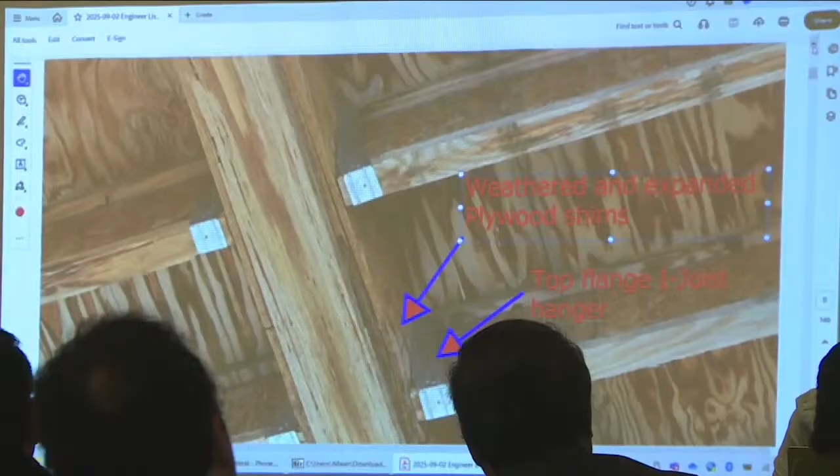And the next picture will show that condition. But before you go there, you see the 2 pieces of plywood? Can we zoom in on that picture a little bit? Up a little bit, please. See the weather-exposed plywood shims? It's being pulled outward because of water expansion.

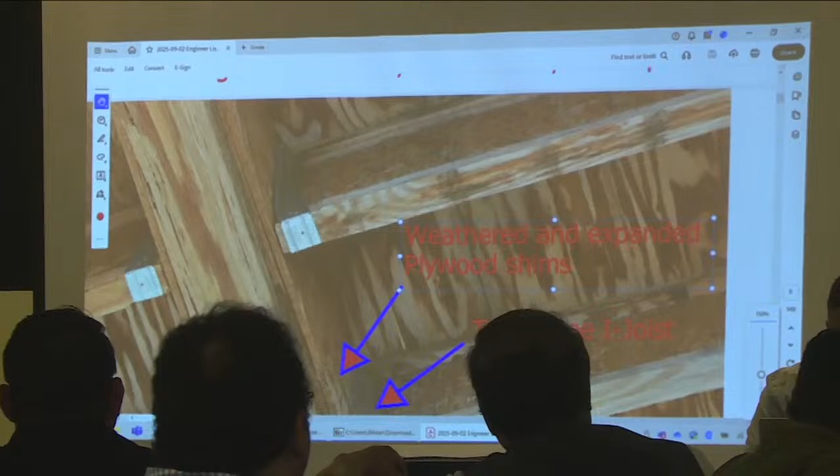With wood soaked in water, it tends to expand, and when it dries it does go back to where it is, but it just causes damage to the wood. And the I-joist, the top flange I-joist hanger there, is hanging off that double layer of 2x plywood.

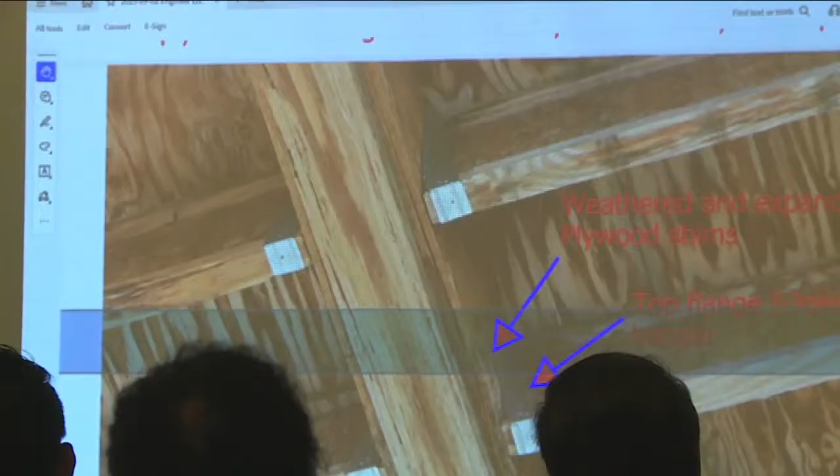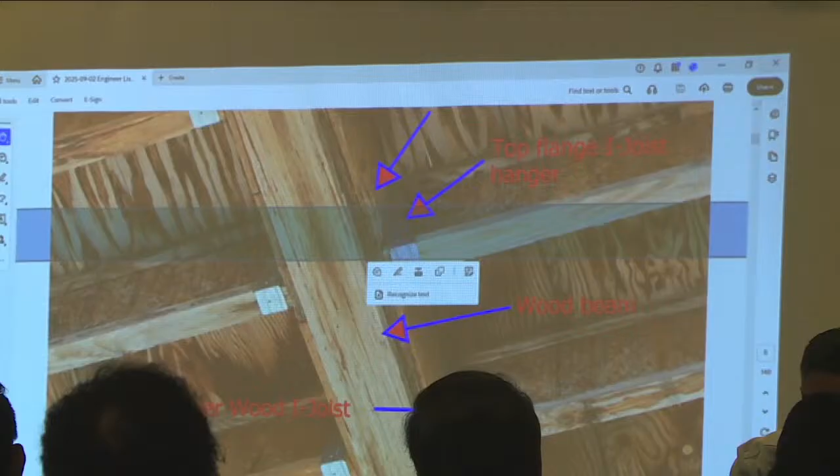And that's a no-no because the top flange is nailed on top of beams. Plywood has joints in between. When you put 2 pieces of plywood next to another beam, you have 2 joints in there. Next picture, I'll show you the reason why.

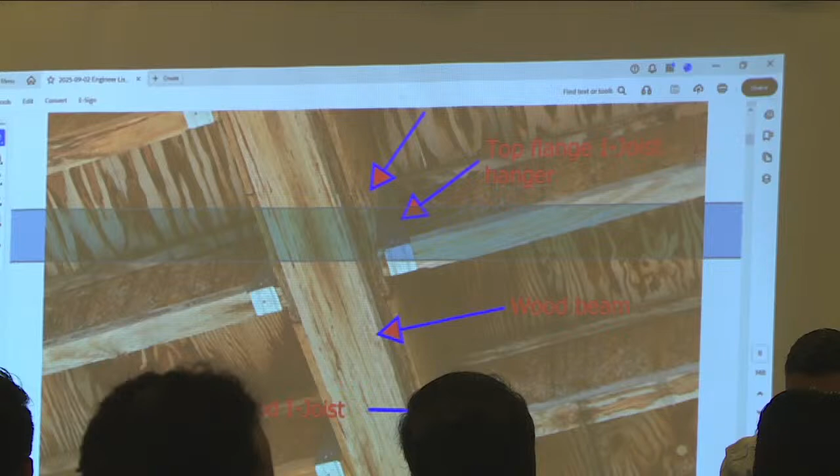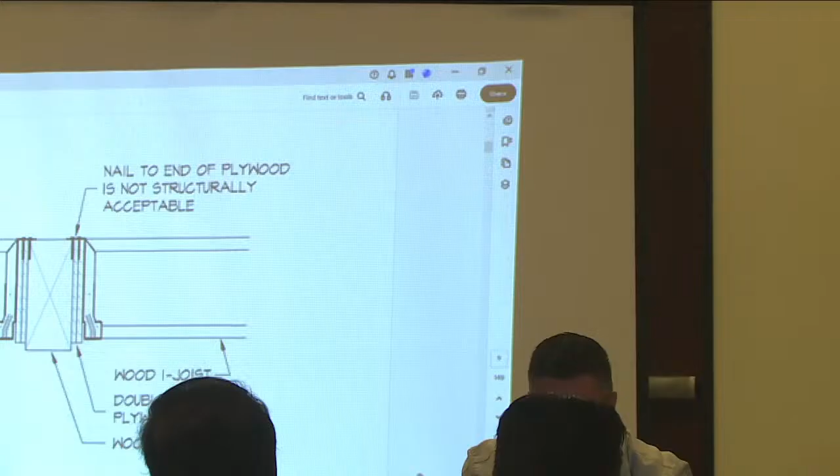Picture next. There's a beam, zoom in on that top portion. Okay, you see there's a double layer plywood, about half inch thick from my vision from the ground up.

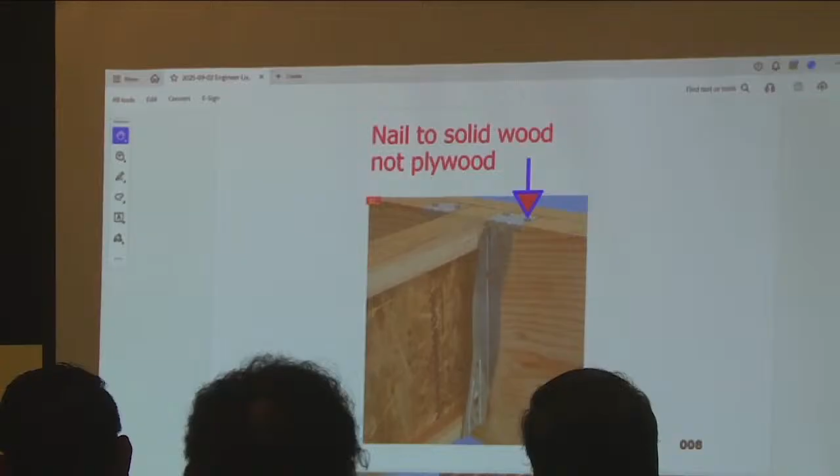Top portion, please, top one please. The top flange hanger, the I-joist, with nails going to the edge of the plywood, is not structurally acceptable. As the nails try to penetrate that plywood, it hits between the plywood or on the plywood or next to the beam. That is no good, you don't have the structural value there.

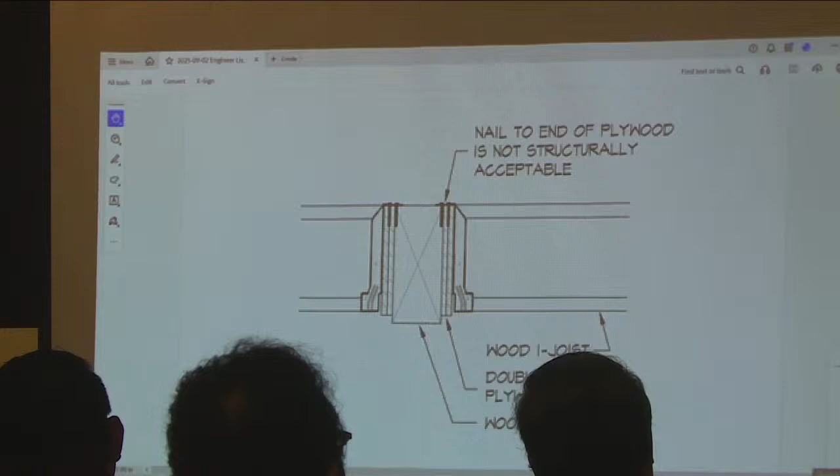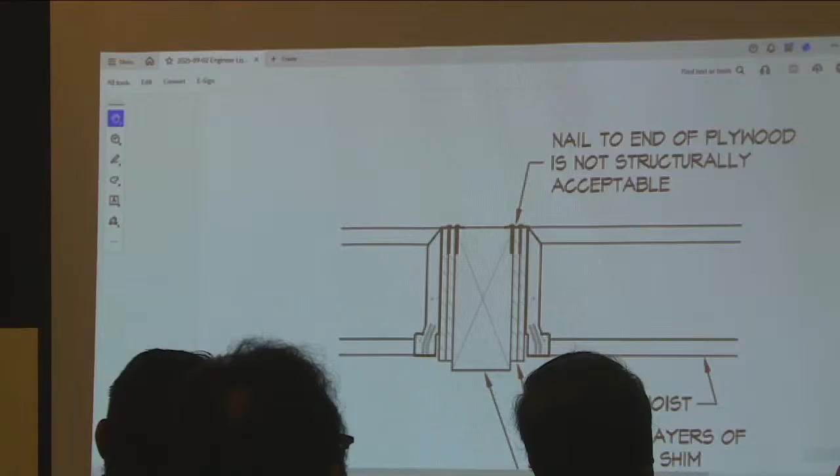Now, was that the only example you saw? Specifically, were there other I-joists nailed in similar fashion in this patio? I do, it does have that. And do you have a rough idea how many? Quite a bit, the majority of the portions on the north section of the roof have that. So many portions of the roof are being held up with joists that are nailed into plywood.

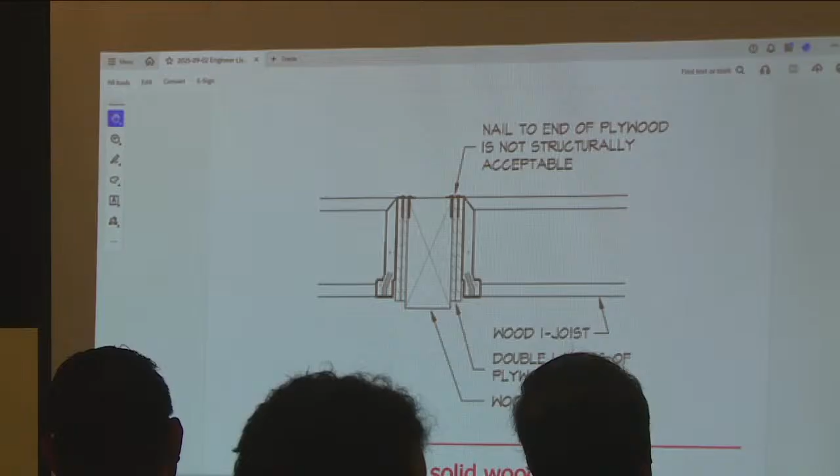If you go to the photo, the picture, page 3 of the PDF drawings, back. Okay, that forward.

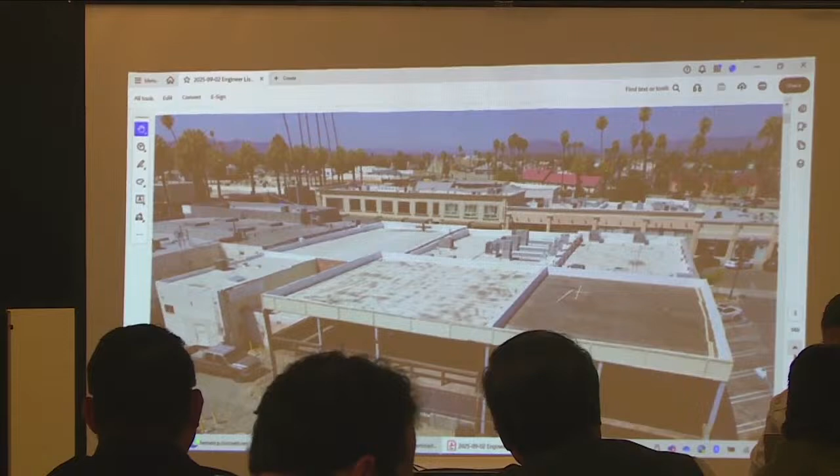That one there. Okay, could you zoom out?

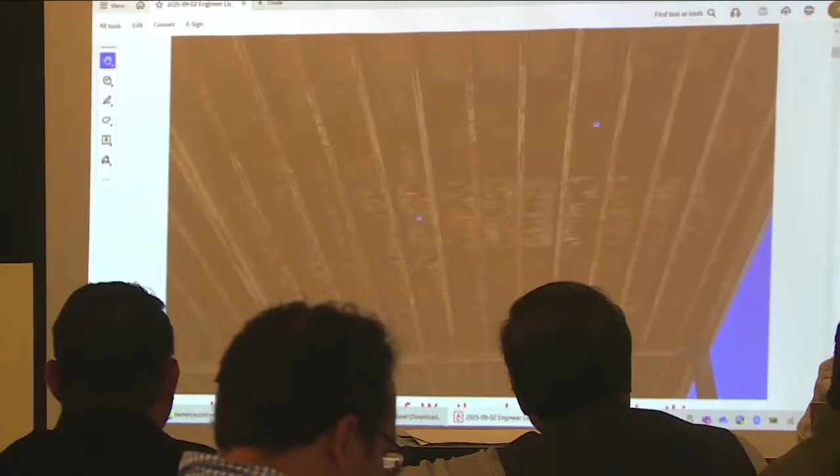There's that beam you're looking at right across there, the bottom portion. Bottom left, put it back up. The beam at the bottom of the screen goes left to right. That's the beam that has that shim plate. And the beam on the top portion, not visible in this picture, also has that. So there are several areas where you have this issue.

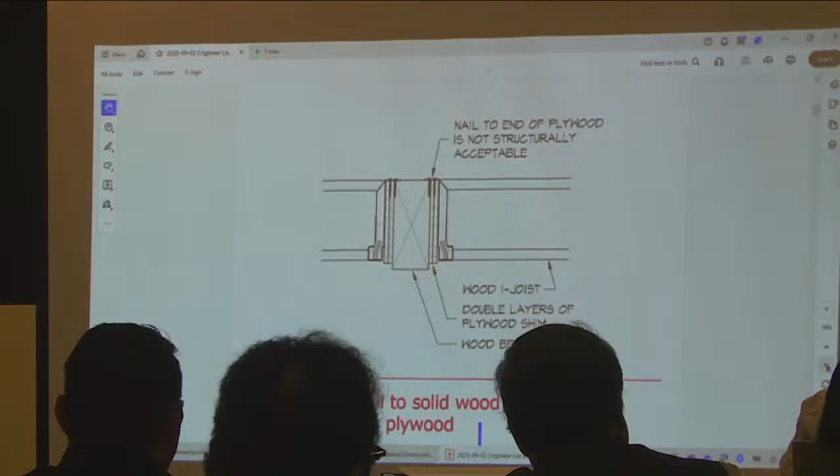And what is your conclusion as to the wood and joists of this patio structure? The roof sheathing is already weather exposed, has so much deterioration already and delamination on that. And the I-joist is constructed of the same type of material, laminated wood member, glued together to form the top and bottom chord. And the hanger on top flange are not structurally sound with its nails. The installation is considered improper by today's standard and manufacturer's requirements. So, in other words, the wood element of this structure is not sound.

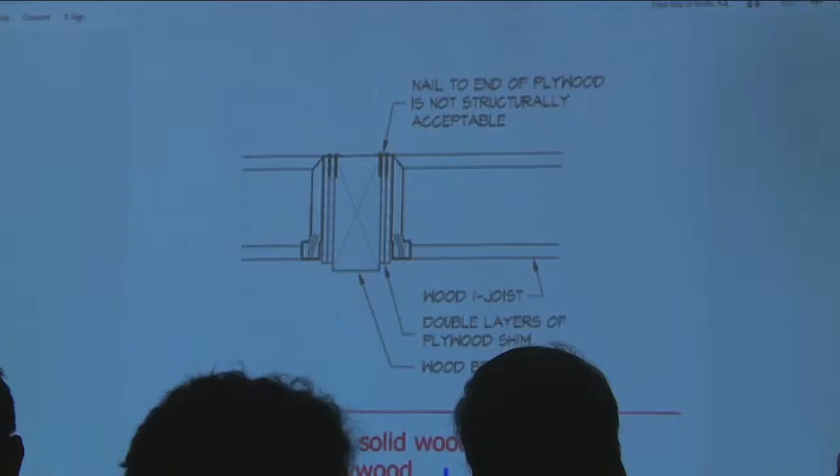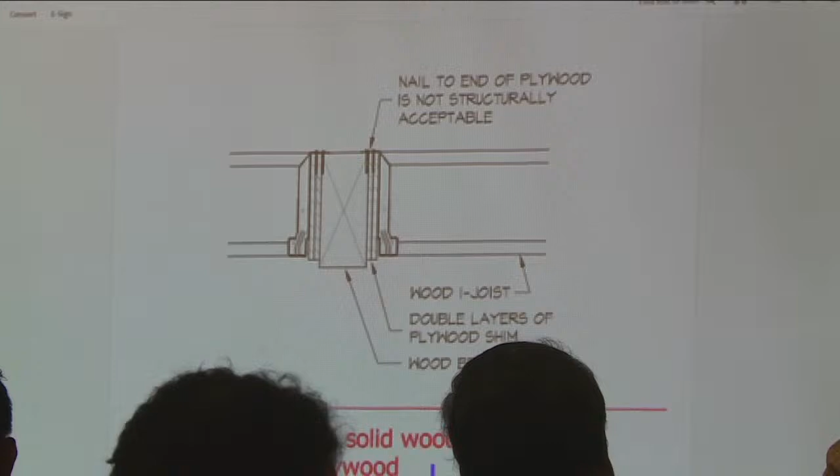No, it's not. And could that result in a collapse of the structure? Whereas the way it stands right now, nobody's touching it in there, it will stay in there for a little bit longer. But it is continually being weathered and weakening, is that correct? Correct.

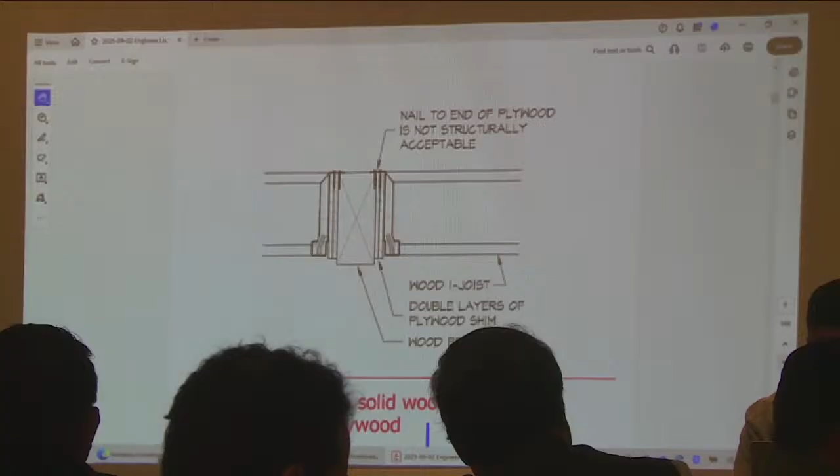All right, let's go to, did you also see any issues with the masonry wall? Yes. Can you discuss that a little bit more? Could I back up, answer another question on the previous picture a second?

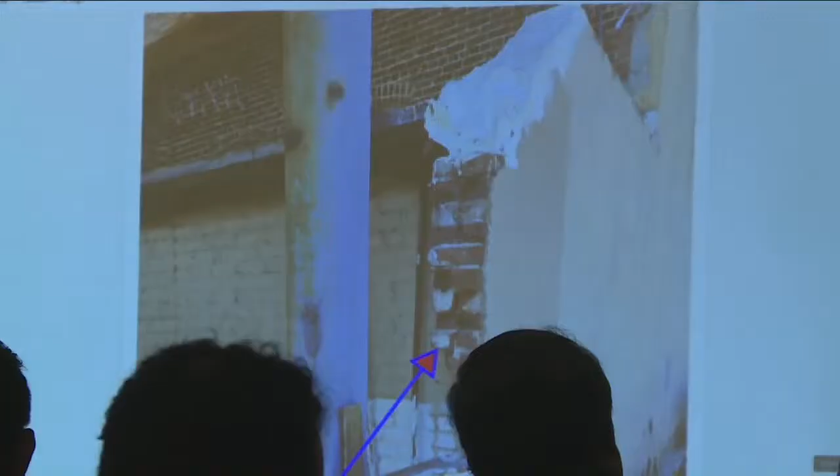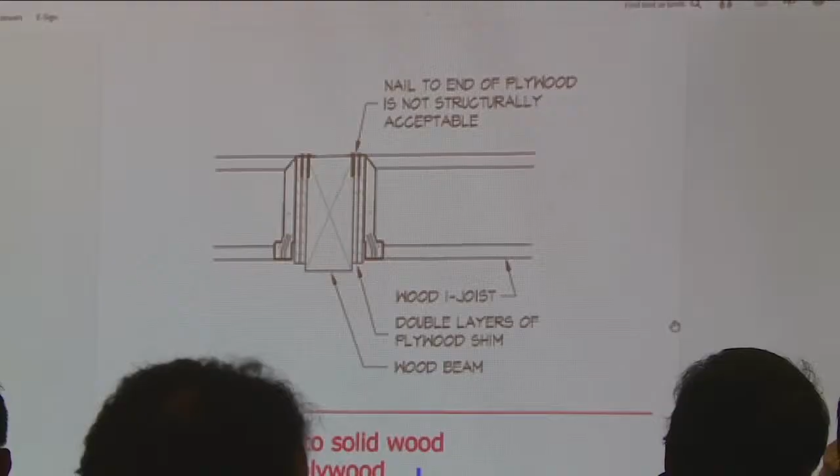If the beam is in question, the I-joist is a much smaller material built of the same type of laminations, glue. Plywood is also veneer sheet that is using glue, exposed a long period of time and weather, is highly questioned and safety is a concern.

And the owner's engineer has raised similar concerns. Yes, the original engineer's statement, dated May 17, 2024, item number 2.

This one here, you talk about this particular picture. Not that particular picture, but in general, why is the wall relevant to the patio? The wall right now we're using to bear the floor load and the roof load. The way it is right now, you zoom in, you see a lot of hollow space in between the brick wall.

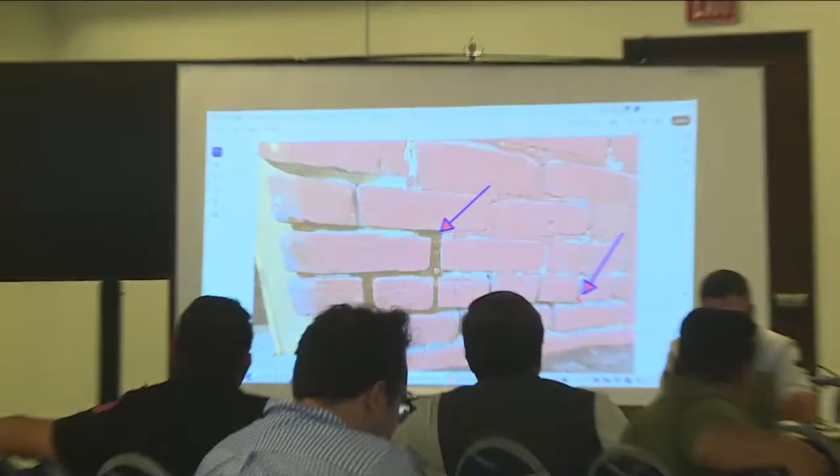That's insulation, it's still in the void space. So that's foam being used to fill in the void. Correct. And is that allowed for? It's not structurally sound, no.

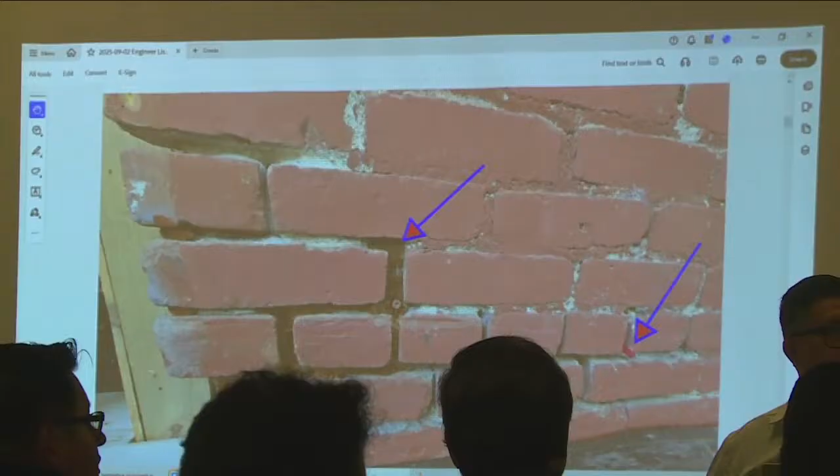Despite the building's age, you think that the building is going to fall down based upon the condition of the building? The building right now has a certain portion of void space inside.

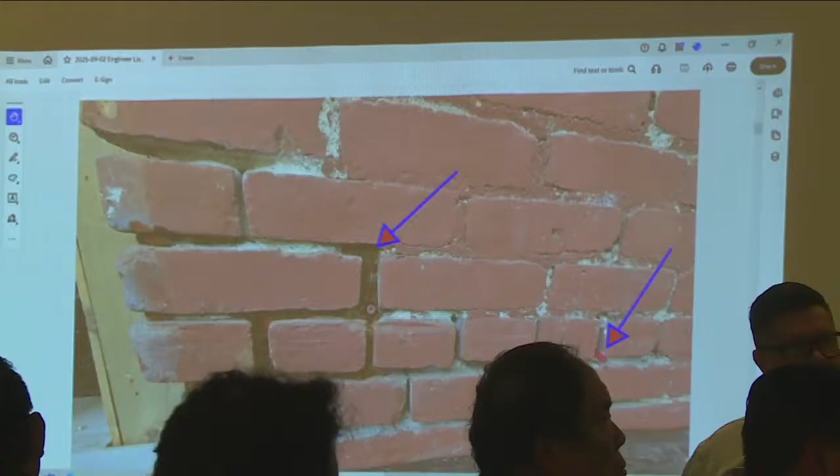This is a double layer brick wall. We are not stressing the main portion of the wall. Think of this wall as having two layers. One layer you look at right here, another layer is at the back side of the building.

Okay, next photo. What are we looking at here? This is my pen, I'm showing how far I'm poking in. I hit nothing.

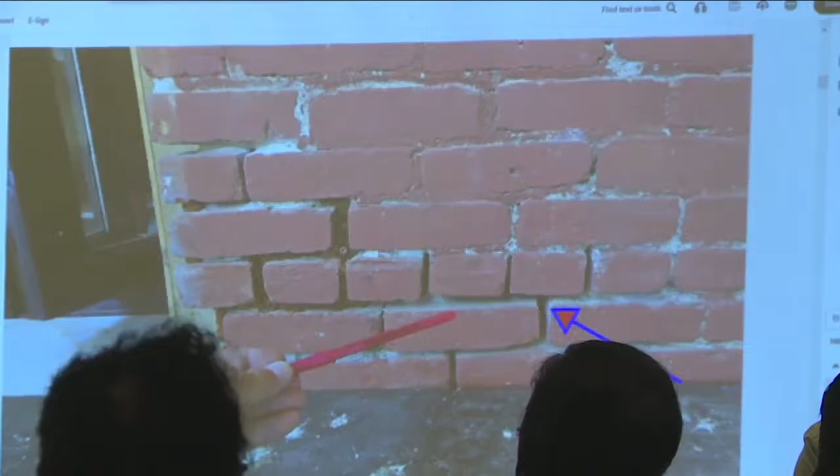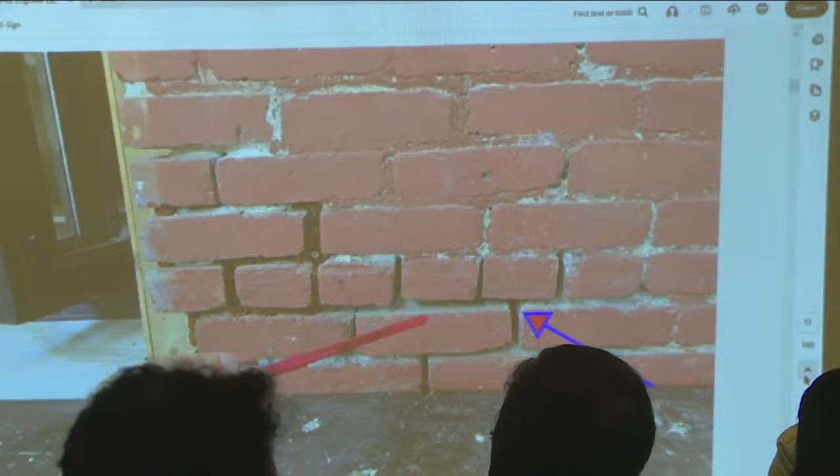Now, normally, could anybody stick anything between bricks that far? You can't do that, I really don't. And what does that amount of space indicate? That amount of space is telling that there's a structural issue. This wall will get addressed before something happens.

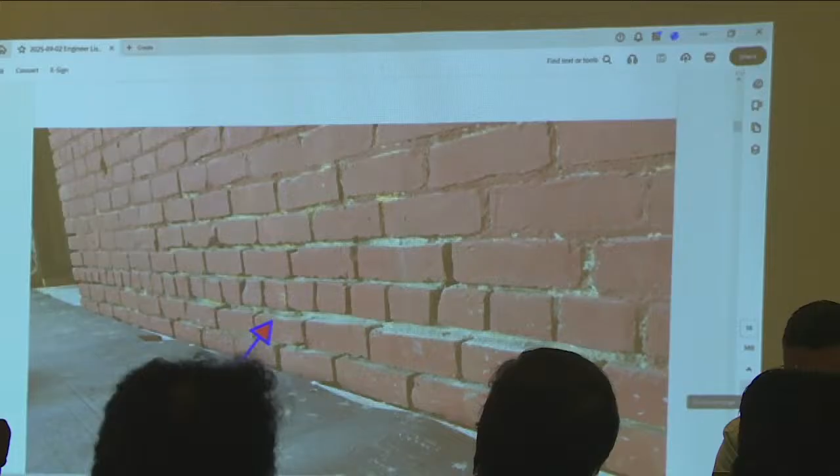And I could just brush my hand with my screwdriver across. It's coming loose, that's how bad it is. So the cement holding the brick wall together is turning to powder, and it's missing enough that there are plenty of voids in between the bricks.

Correct. And you indicated earlier that this brick wall is bearing the load of the patio structure. Correct, and the patio, sorry, go ahead. This brick wall, the way the structure is currently framed, is carrying the roof load and also the floor.

Also the dining hall area of the restaurant building, of the restaurant, of the two-story addition.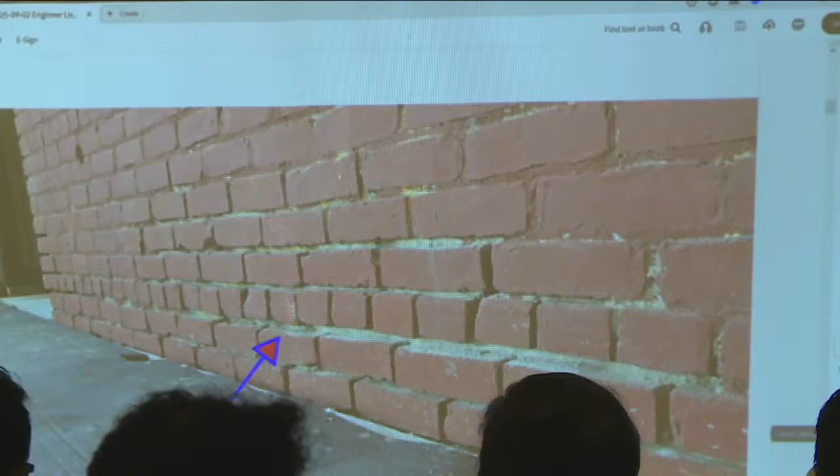And you also said that the patio is bolted to this brick wall. Correct. All right, let's go to the next photo.

What are we looking at here? This is a picture close by the gas line on the existing brick wall dwelling. You see the big gap there? That's showing a sign of foundation settlement. A portion of it is falling down here, not just a split.

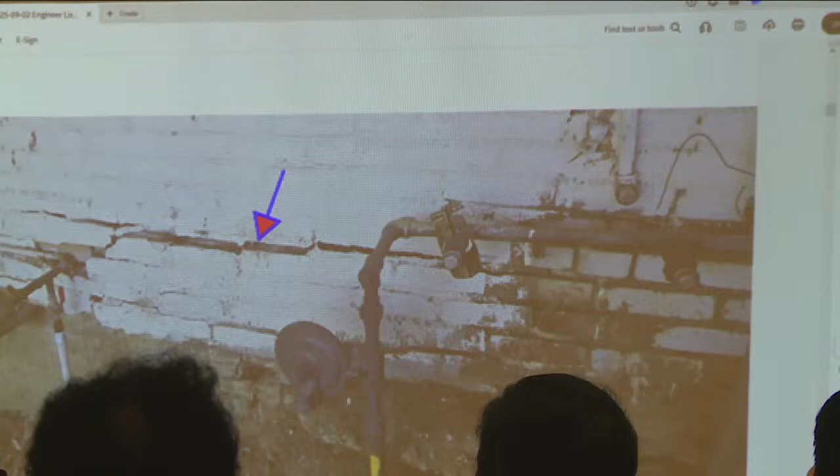And what kind of concerns does that present? That's telling me if it's the foundation, it's also very questionable, and I would not put an additional load on this wall until I find out more details about it.

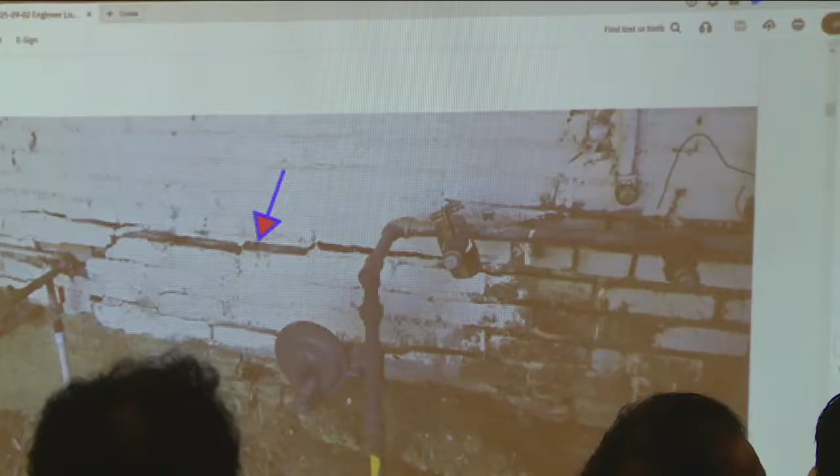All right, next image. What is this image depicting? This picture lets you see the brick wall on top has a missing piece. They just built this bearing wall on top of unreinforced brick wall. Some of this brick wall already came off, and that's why you have a hole in the top there.

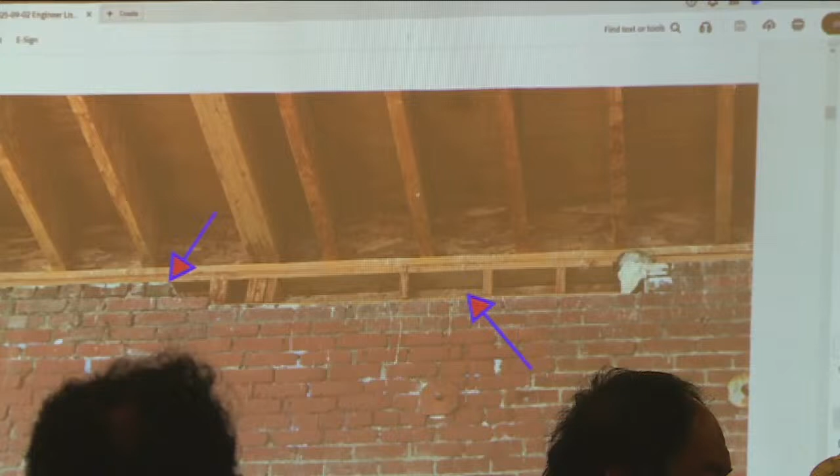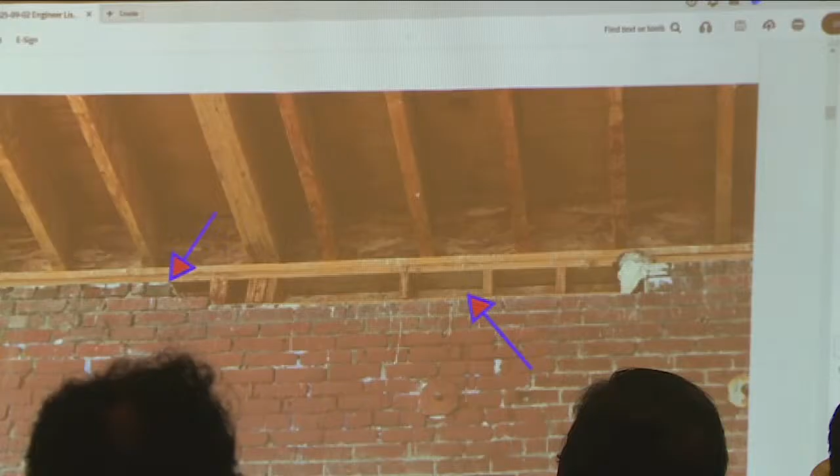And you see on the side view there, I said you have void space there. There's a lot of void space in these brick wall additions. And that's where the patio is resting on top of, correct? That's the roof that is resting on top of this brick wall right now.

All right, let's go to the next page. In this picture, you expect to see this, but the brick here has no grout around it. It's pretty, I would assume, pretty loose right now, or it's just resting on top of it.

So for all we know, this thing could be resting on top of these bricks. I just don't know this real quick. All right, let's go to the next page.

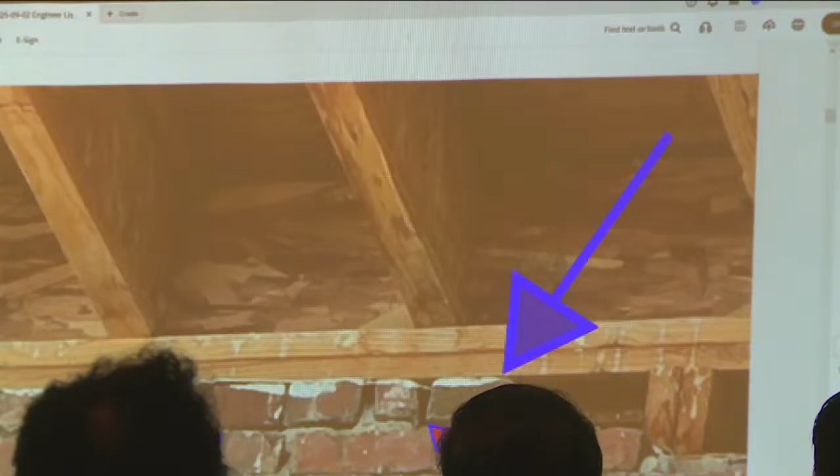This is a picture of a crack in a brick wall and void space between bricks. It looks like the crack is running across through the top of the image.

That's usually telling you stress shears in the wall. Stress shears means the wall system's stability, regarding the roof systems, raises more questions about putting an additional load on this wall, or asking it to take seismic load of an additional two-story building.

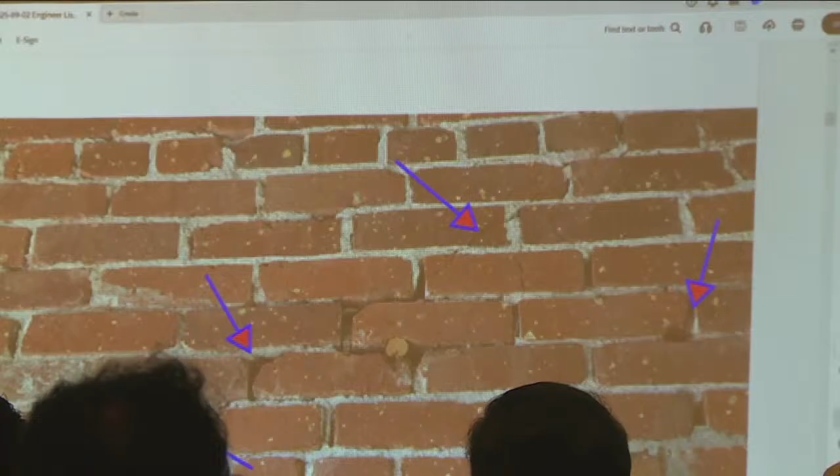Would insulation solve any of the issues you've been looking at so far? That insulation looked like a foam insulation, a liquid that comes out of a can and expands inside there. It has no structural value.

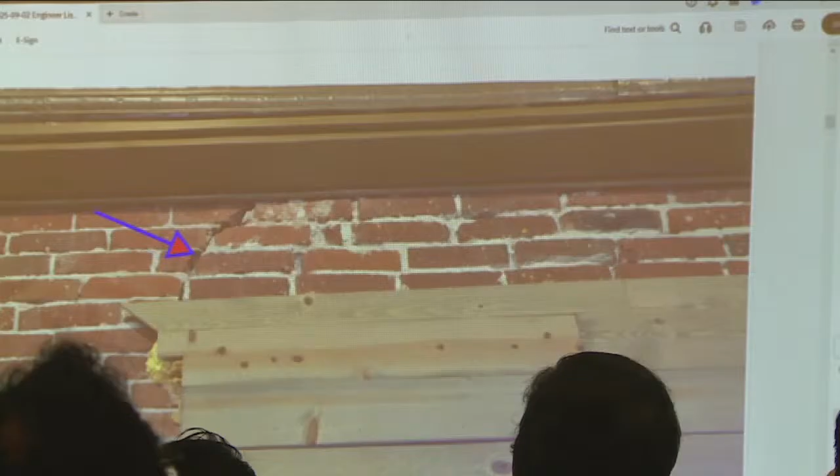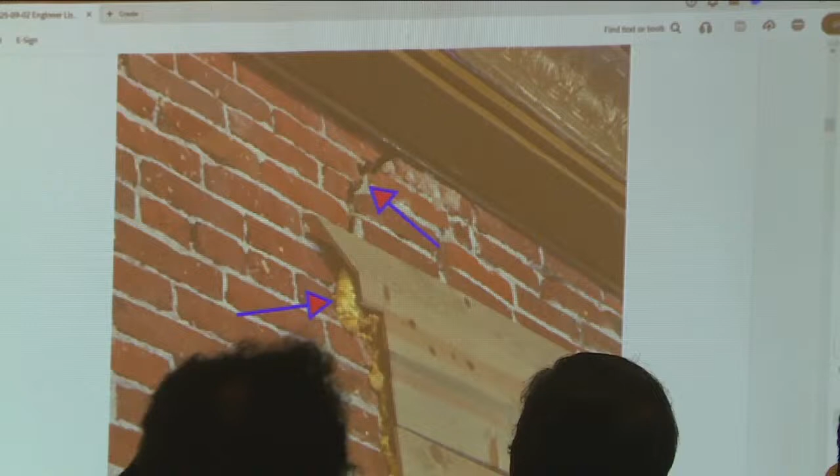Next image, that's the same picture, looking at the angle, showing the foam inside that portion. You see the large crack on top there. I cannot visually trace where it goes, but this is inside the building on this brick wall. The outside is the issue, and I can't see how far it goes up.

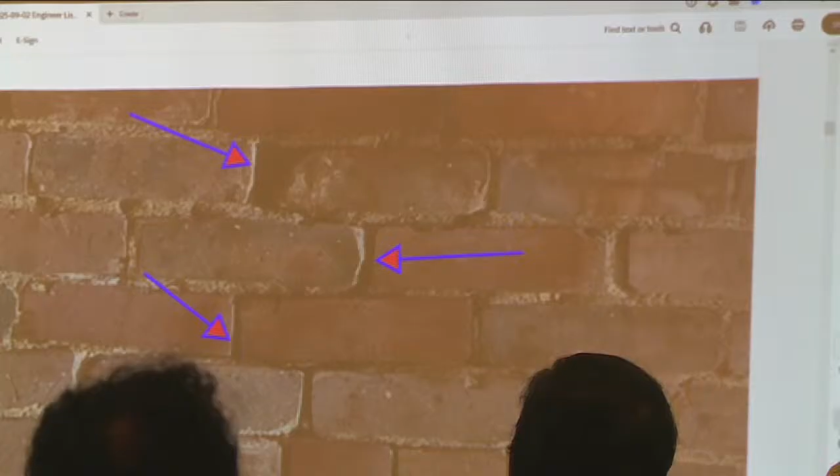Next image, this is another brick wall picture showing there's void space between bricks. Can you explain what this image shows?

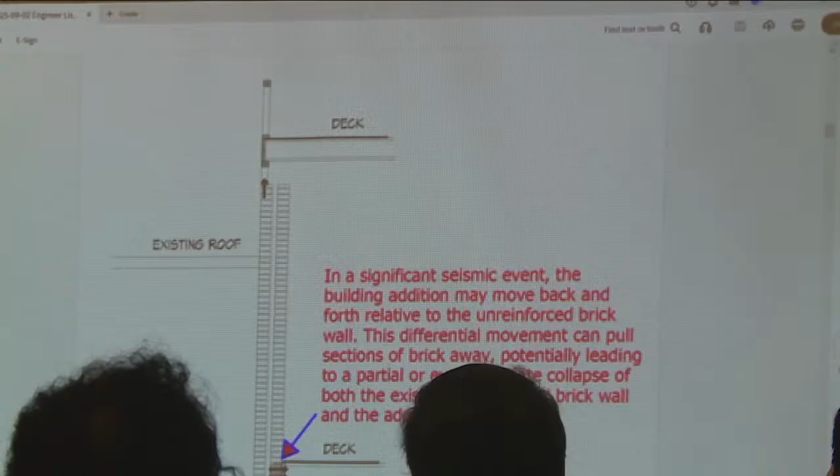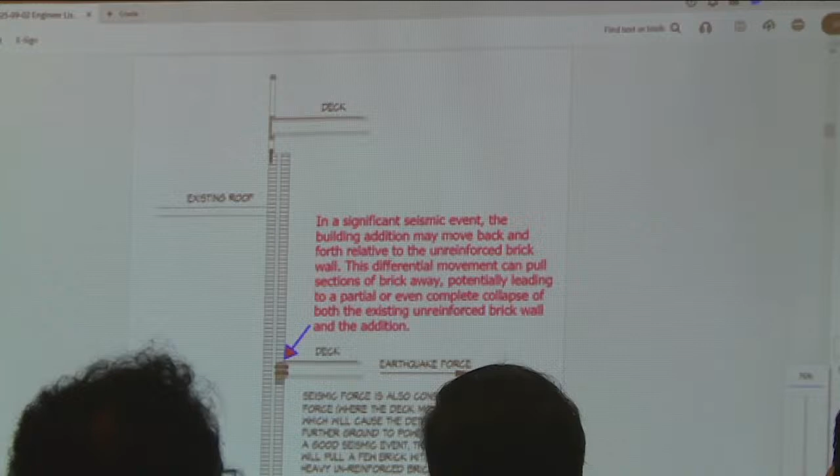This image showing - you can go up a little bit, okay, zoom out a little bit, zoom out, okay, you see this? I drew sections of this brick wall. There's two layers, and in between, these bricks are grout bonded together.

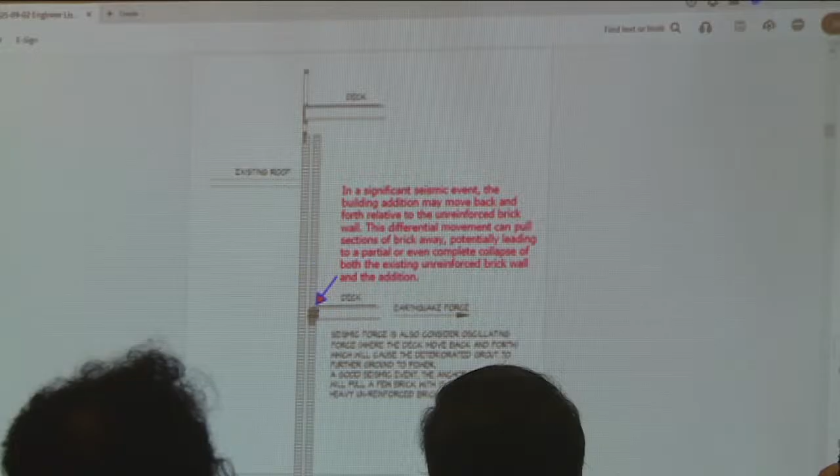You see the height on that. Left side is existing structure roof climbing to the brick wall. On the right side is a roof sitting on top of the brick wall on the back end of it. The bottom portion is a deck tying to the brick wall.

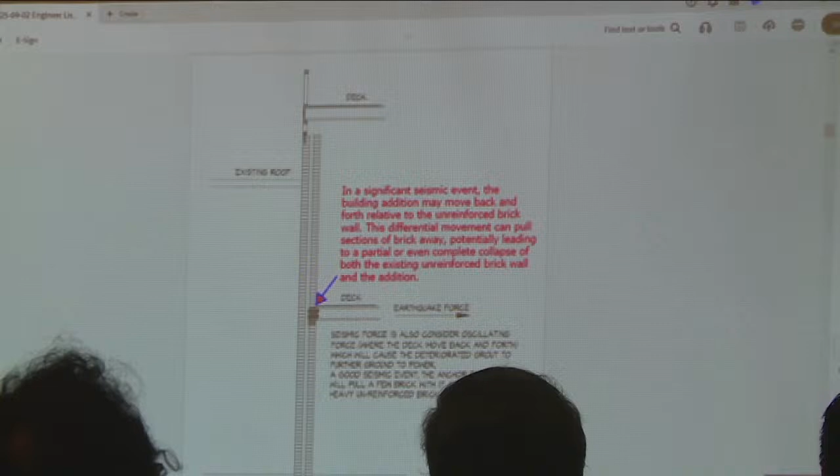Could you zoom in on that red statement there please? Okay, In a significant seismic event. During an earthquake, the addition may move back and forth, forward against the wall, pull against the wall, rough up the unreinforced brick wall. The differential movement can pull a section of the brick with it.

Especially when you asked a question earlier, how does this floor connect to it - it has a ledger, all epoxied to this brick. When this portion moves, earthquake force pushing on the right side, that floor will pull that brick out of it. Once it pulls out of it, this same grout will do the rest of its job, taking it down.

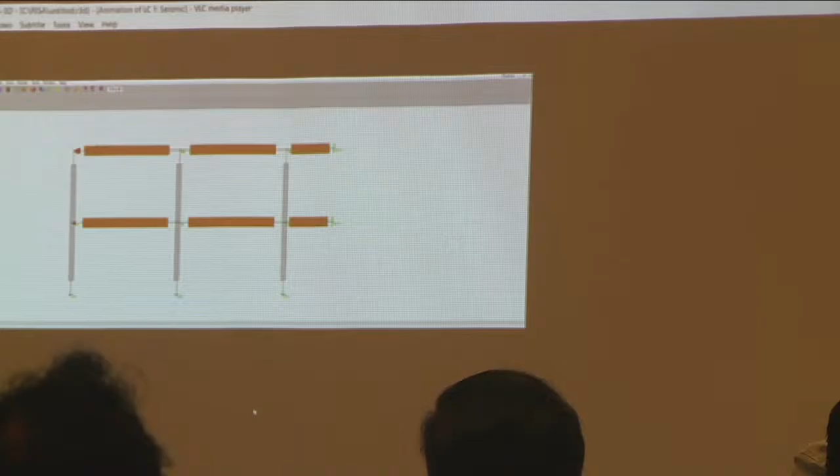Now, in this scenario, is it possible for both that brick wall and the patio to collapse? If you pull a section of that brick away, gravity will do the rest of the job and collapse the buildings. So both can probably fall down.

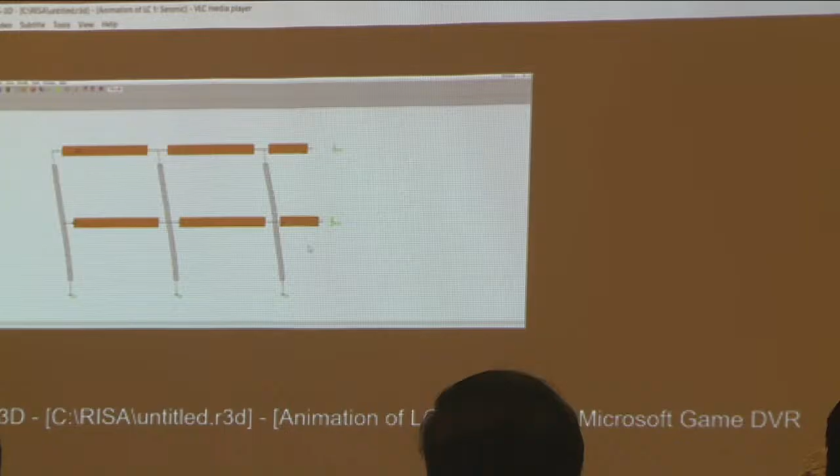All right, can we go to the next page?

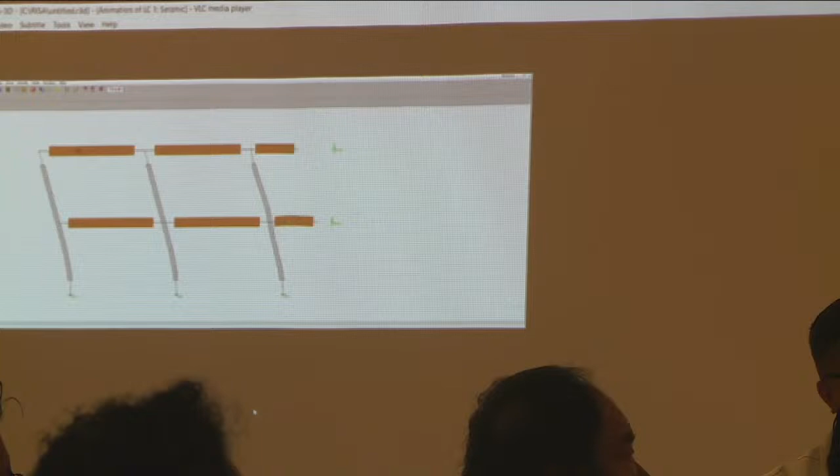Yes. So even if it was permitted, it would still be potentially a structural challenge. This is where I really appreciate the plan checkers and inspectors who see this on site and prevent this issue, especially with structures like these examples. Another engineer checking my plan and questioning it, I would really appreciate that. I'd take them out for dinner for what they've done for the city. This kind of case could be a major issue.

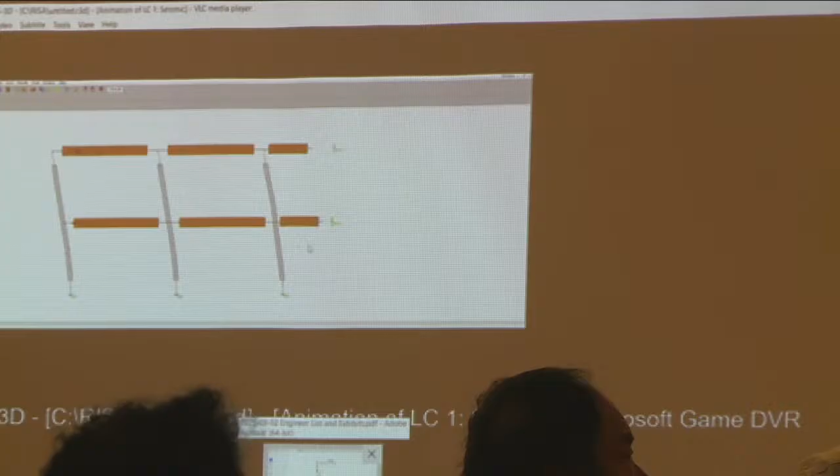And just to be clear, you weren't involved in any of the original plan checking, were you? I did not review the existing plan. When did you become involved?

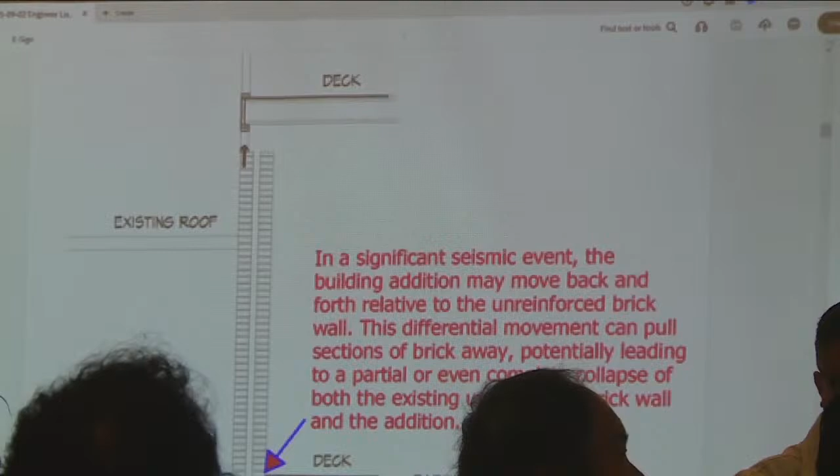We said about... let's... all right, what is this? Go next image.

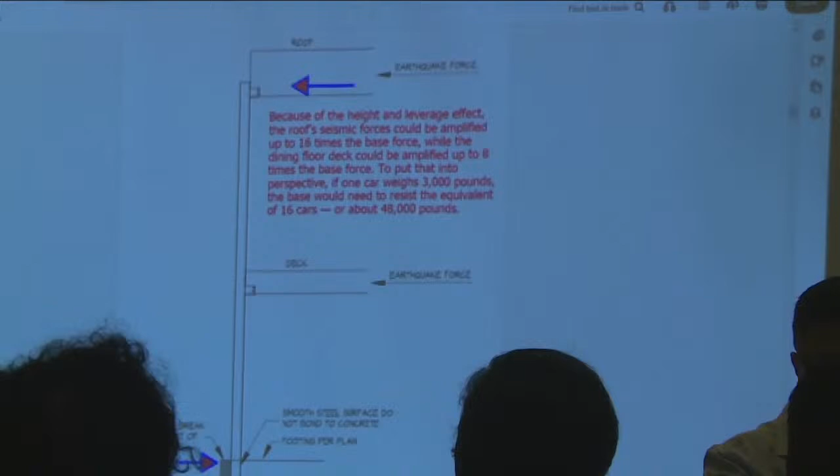All right, what is this image here? This is a picture of a wood beam on top of the roof and a deck that is attached to a steel post. See the bottom portion of that? It has a small pad footing, 2 foot square, and a footing tied around it.

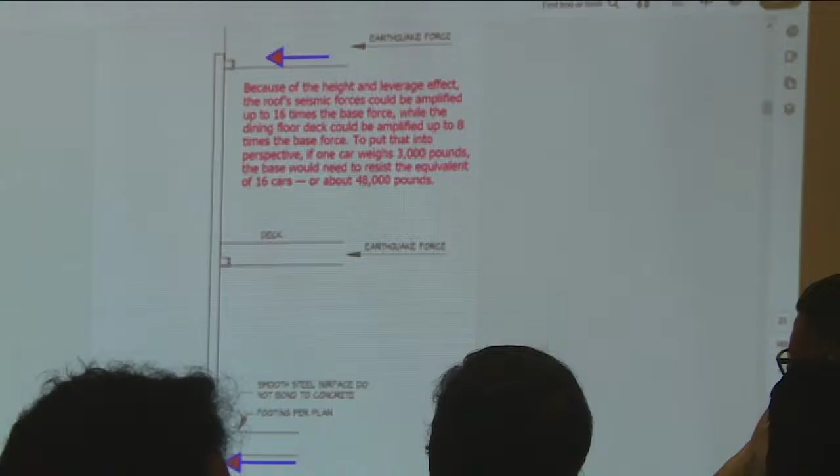Just think of this: a seismic earthquake hits it. If you have a car up there that weighs 3,000 pounds, because of the height, did you zoom in at the red words? You see that? Because of the height and leverage effect, the seismic force will be amplified to 16 times the base force, while the dining deck, which is lower, will amplify about 8 times the base force.

To put it in perspective, one car weighs 3,000 pounds. Our roof, the way it is right now, weighs about 3,000 pounds. Just the plywood and the I-joist, I'm not talking about anything else.

You take about 6 pounds per square foot times the area. If that's to move left or right, it will produce a 48,000 pound force leverage at the base. Zoom at the base of the bottom footing there, zoom out, you see a little more.

You see the lever, I put an arrow at the bottom portion there. That's the lever trying to hold the roof force moving to the left. You have a coupling force trying to resist that.

So the footing here has to resist 16 times the weight of the rest of the building? Correct. And based on the existing footings, do you believe they can do that? No. Why? Because looking at the columns at the end, the footing per plan is only like 18 by 24 inches.

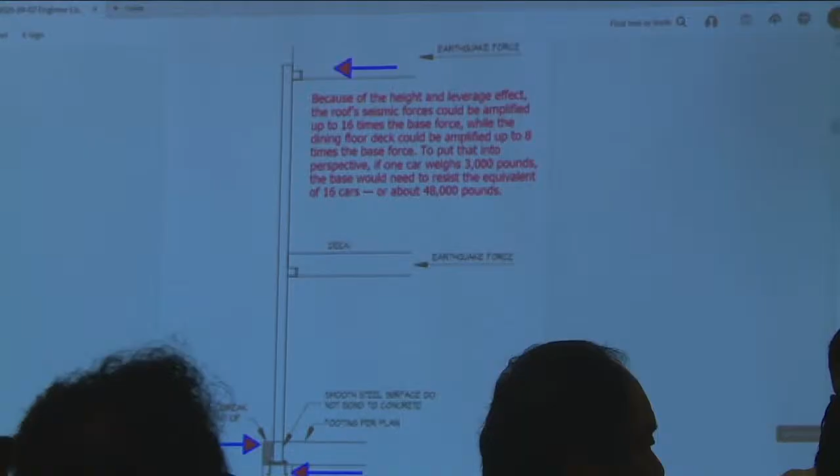Because it would collapse. Can you summarize the elements that you identified as problem areas?

The unreinforced masonry that we anchor to is unsafe, given an earthquake moves, the core section will break down and collapse that wall, and any load on top of it will come down. The second issue is these columns are not designed or engineered by Mr. Song, as I understand it. I haven't seen the plan to carry this kind of load. On top of that, this frame system is considered flexible because it will move back and forth in that earthquake, where brick wall buildings will not move much, and it will tear itself apart.

That solution is separate. The issues with the wood I-joists could also contribute to this, yes? The wooden I-joist carries the weight. For example, take a table on top of a floor during an earthquake, it will shift left and right, or move across the floor. Same thing with an I-joist and plywood - with weight on it, it will move left and right, whatever direction the earthquake hits, and these steel posts have to hold it in place. If you imagine weight on top over 24 feet being pushed around, it will flex - it will give way, it will flex, and anything that anchors the brick wall will take the load.

Does this patio structure currently have enough lateral resistance to withstand an earthquake? No, absolutely not. Not by this code, by California building code right now. The city's recommendation in this case is to demolish the entire patio structure.

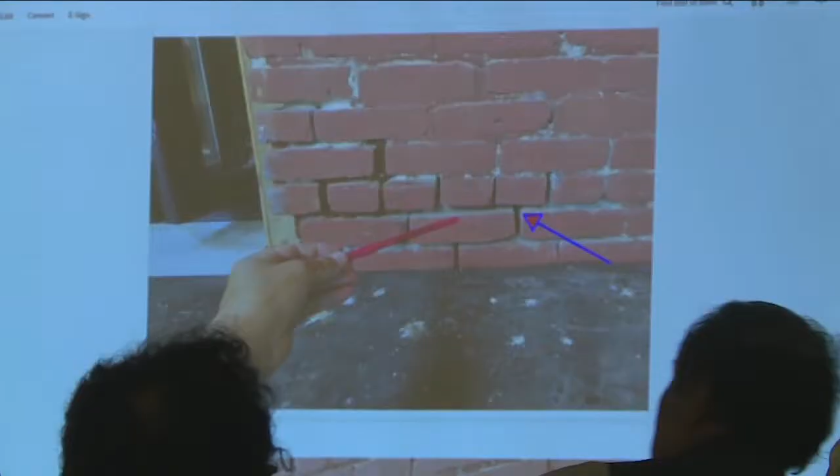I don't remember which one it was. I found it - it's the one with the white line. Yeah, it's probably about page 13 down. Back a little bit. How about go back 13 down? Oh, after that one. After that one. One more. One more.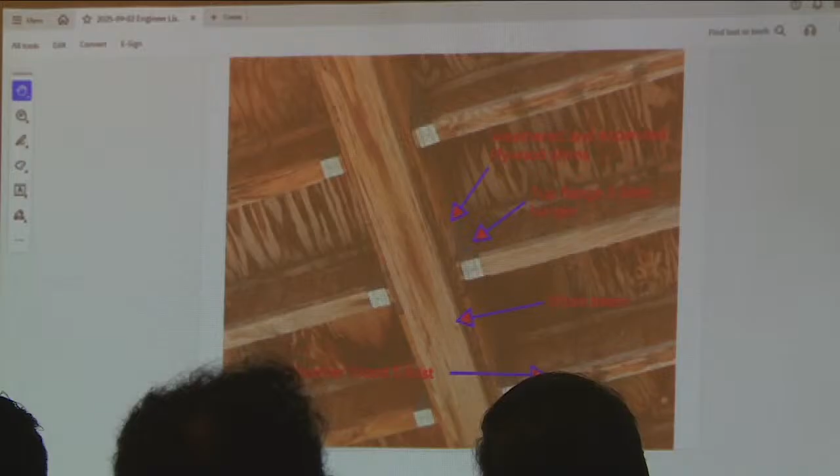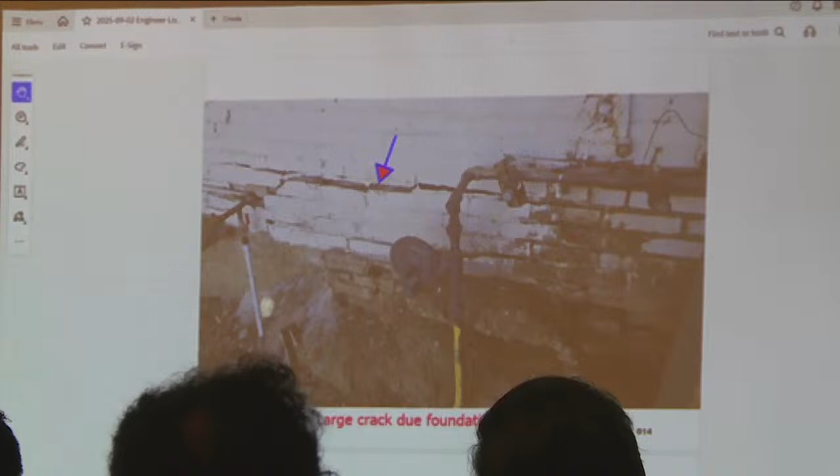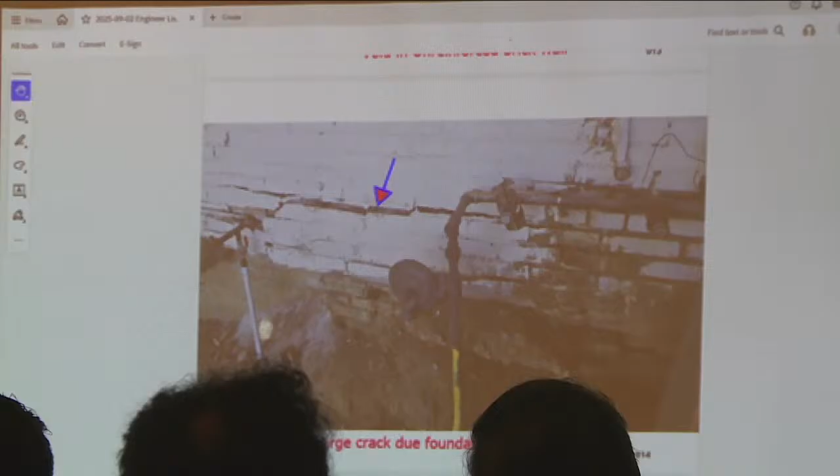There it is, and you see the foundation on the left side, on the bottom right corner. Zoom in there, a lot of dirt is going over in there. I see the foundation there is settled in. See the bricks and the fall of it, and that's just pointing down the separations.

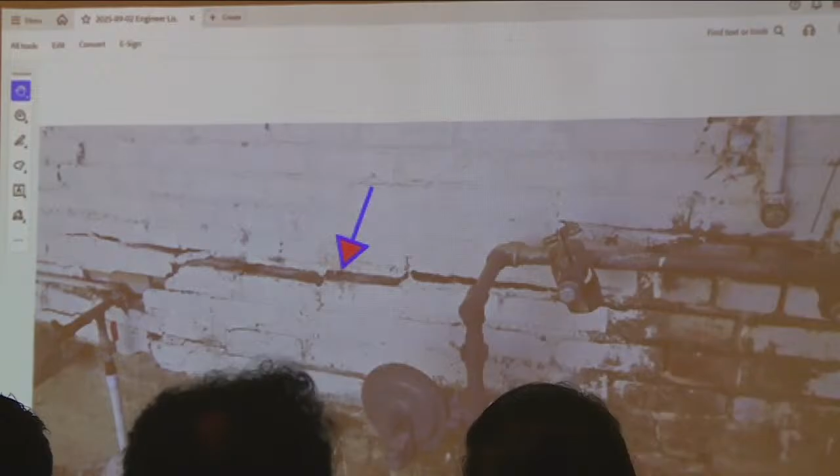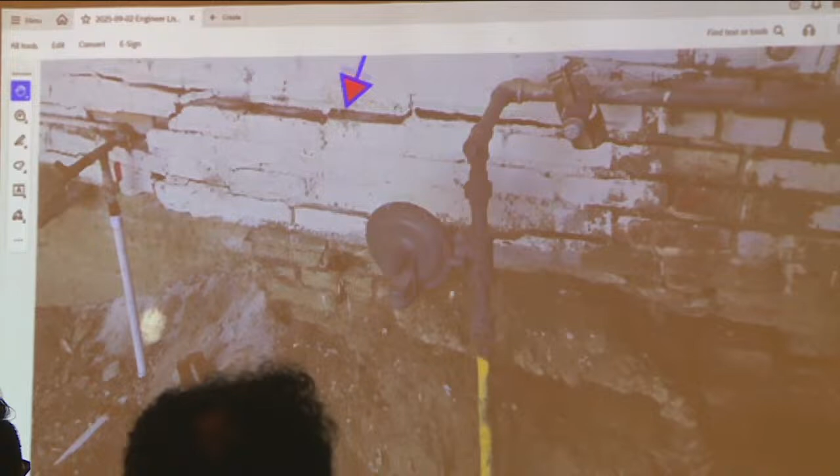Right now the wall's trying to find equilibrium. The foundation there is loose. Okay, so something would need to be done to secure that area of the foundation and other areas that were compromised in this fashion. This is the only area I looked at, this area right here.

Okay, and you didn't see any other areas where the foundation was compromised? Most of the areas is covered, I cannot see. Okay.

Very good question. Has there been any seismic analysis of this building? I did a brief analysis on that, what I call the load frames. What about seismic retrofitting that is taking place, or seismic permits? I have not looked at that, I haven't studied that. Do you know if it's actually taking place?

Well, speaking of that, are you aware there's been 4 earthquakes in Hemet in the last 24 hours? No, how big? I don't know, I just know that there's... 2.5, that's pretty small. Okay. Or that there's been 19 earthquakes in the last 7 days. Earthquakes happen in California on a regular basis, a small thing, it's understood.

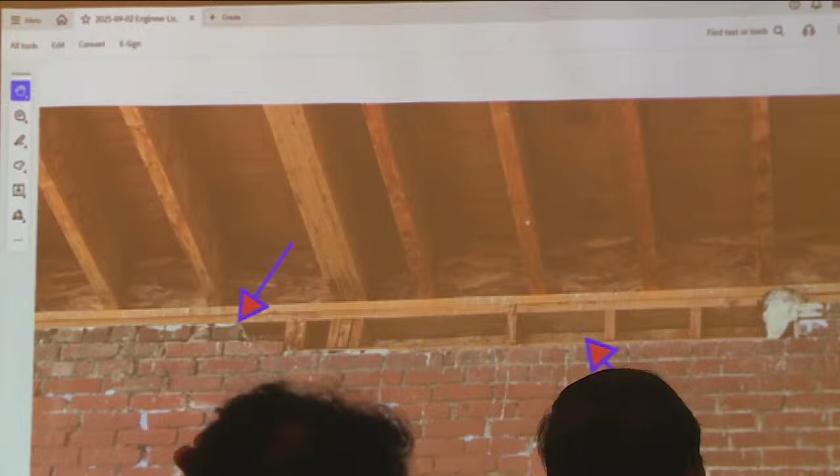So you said there's a lot of earthquakes in California. Hemet, in the last year, there's been 844, right? Yes, minor, right, they're not big. I think there's probably a range of them, anywhere from 2.5 to 4, with most of them being the more minor, right? I'm not aware of that stuff because I'm not here.

I don't see any feeling, I didn't feel any ground movement or anything this whole day. You said there's 4, I didn't feel anything today.

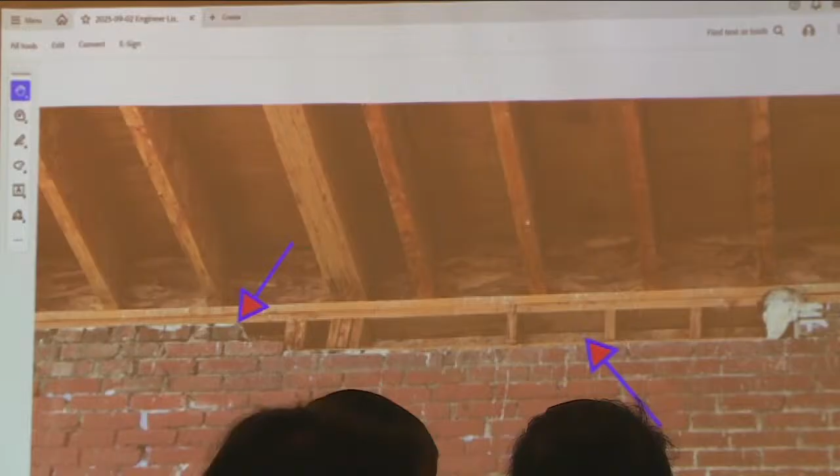But you look at the picture there, it's just brick and a little bit of concrete on the bottom. Is that what your question is? No, it's just you mentioned that you likened it to a flagpole, and those steel beams are kind of like a flagpole going into the ground, I think it was 24 inches, right? I didn't say 24 inches.

Okay, and did you look and see if there was anything else, like grade beams, that were assisting in spreading the load of those beams and footings? You talk about the post trying to carry lateral load or vertical load? The lateral, as I expect the pictures like that, you see the columns.

You show that picture again? It would be toward the end of it. One more, see the bottom? Show the bottom portion, please.